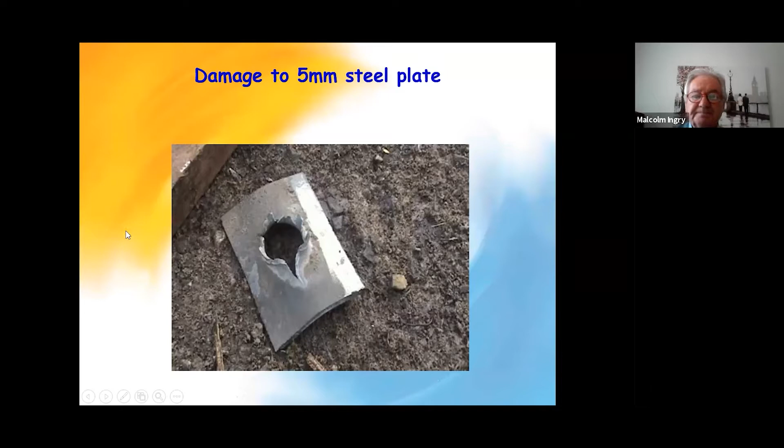It's got a velocity of detonation of something like 8,000 meters per second, and it's one of the most brisant type explosives that you can get, typically military. So this is again, sticking with the film industry, this is how it's done when you look at your television, and it's general all the way through. There's nothing, what's the word, a black mistake or anything. To get a good bomb hit or a good bang out the ground, you can see there 5 cartridges of nitroglycerin, which is approximately 1 kilogram, on a sandbag.

The reason we put it on a sandbag is if you put it on the floor, it recoils into the ground and moves shrapnel, dirt, stones throughout, killing the stuntmen. So you let it recoil into a bag, okay? And then, you can see there, anybody who understands explosives, I've got detonating cord coming all the way around in a ring main, so you won't put your detonator in, you'll put it outside. So if you have a bad detonator, you can replace it without digging into the pile.

Yeah, that's cement. Over the last few years, we've started to use lime dust, because what happens with cement, with the intense heat of the explosives, it makes it into concrete, and it moves big lumps of concrete around, again injuring people. So it's a fine limestone dust.

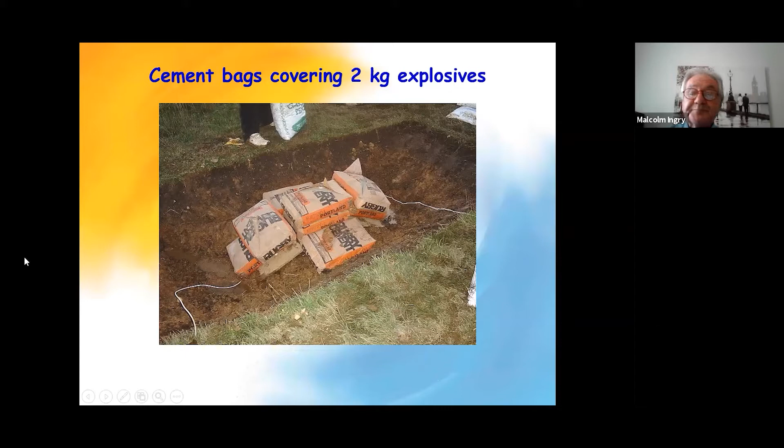And then we put our peat, our turf, and whatever. And basically, there's your bomb hit. We usually put a wide pointer if we've got 4 or 5. So when you've got stuntmen running about, you ensure that you know where they are, where you're pressing the button. Some companies have switches with probably 20 or 30 switches on, and 20 or 30 sequences, whatever you want to do. So it's all done electrically.

We also then put a dummy. The films that have a lot of money, not most of them, but the big ones, they'll get 2 dummies and they'll do a test with not real rocks, but to get a distance, just how far they need to be away from the bomb hit or wherever they're doing.

Okay, and then finally, Malcolm Ingry steps into the breach, and he stands there. Sometimes his wife finds out he's got brown underpants, and I have a go at doing it myself.

I'm standing next to quite a lot of nitroglycerine, so this is the effect. Sorry. 1. I can assure you that's not a cardboard cutout, that's me. Okay. 2, 1. And there you can see how high it goes. So it's quite a substantial bang. And then once I'm happy, then we'll go on to the set and start doing it with the stuntmen.

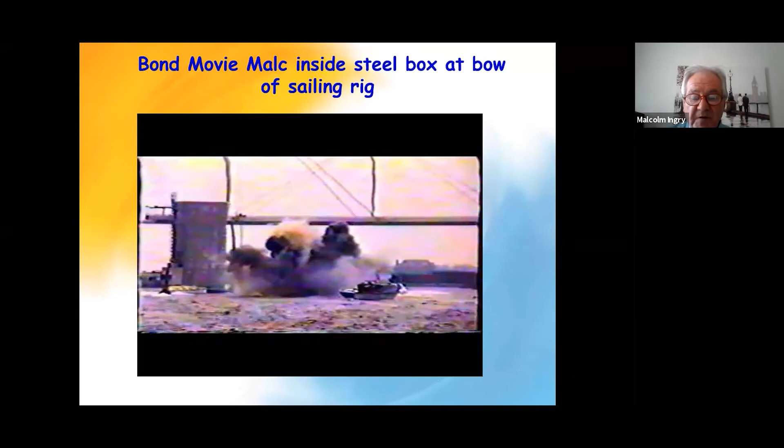So it can be quite effective. I'm safely in a steel box, and then there's one fireman down underneath with these hoses.

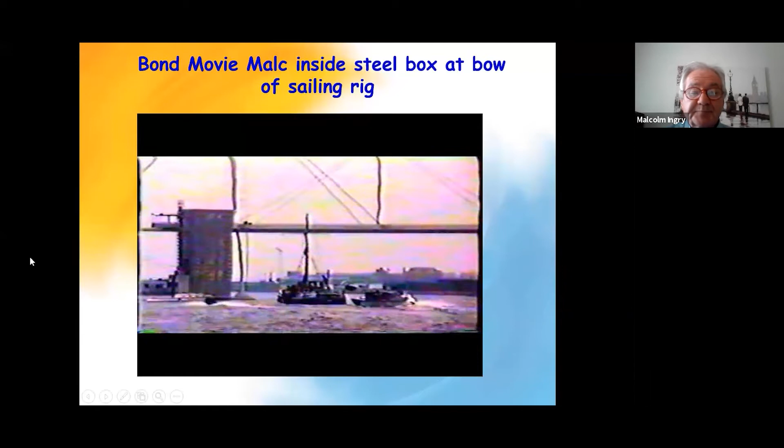Right, the sound on this is not very good. This is in a churchyard, a National Trust churchyard, just off the M25. Not the M25. It's the other one, High Wycombe. And Johnny English is at the top, which is Mr. Bean, and we're at the bottom, and he's saying this is the safest place. And what we've done, we've got quite a lot of petrol around the gravestones. And basically he's saying, you know, everything's safe, we're burying him and nothing can go wrong.

As you can see, it's quite a lot to set that up, because you've got a National Trust church, so you've got air overpressure, vibration, all those kind of things. So there was a lot of work done beforehand to ensure that the National Trust and the vicar let us loose in his churchyard.

Okay, this is Hannibal Lecter. This is the first take, which was done abroad. There was a period of time where a lot of films were made in sort of Poland and those areas, cheap labour. So this is the first take of a plane going down towards a tank. Once we're all satisfied, then this is the second take.

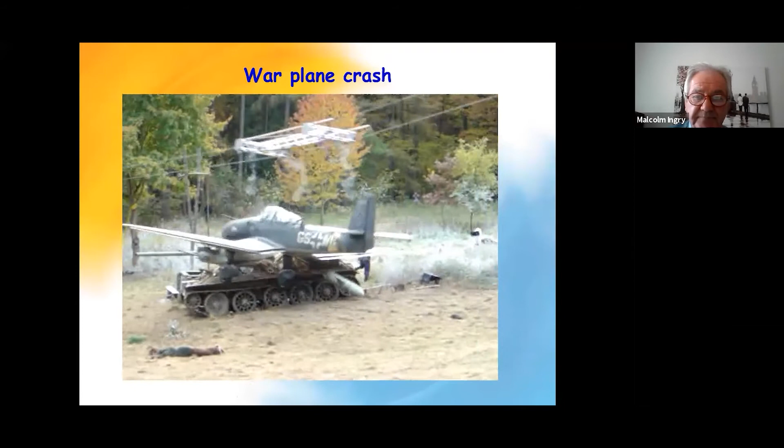See, there's quite a lot of planning there. You've got people there, real life people, stuntmen, and it looks quite effective. And again, the detaching is a small explosive that detaches the plane off a hook and that goes down as well. So it works in with the actual thing.

Now this next one is, I'm just trying to think, it's Batman. And what we've done here, what they do, the director brings you in and tells you what he wants. They use a lot of cartoon sort of sequences, and they say, this is what we want. This is Dark Knight, and this was done in Chicago. So this is basically his comic strip telling you he wants the school bus, he wants the Joker's cards coming out, he wants a real live building he can demolish. They don't ask for much.

And then this is done just prior to the school bus on its way. And then the building actually drops.

At the time, we looked all over the UK to find something suitable. I was working on a demolition up in Glasgow. We looked at that, but it wasn't what he wanted. So they had to go to Chicago. And we worked with a guy called Mark Loizeaux. And you'll see a lot of his videos if you go on YouTube. He's been here a couple of times in Sellafield and Liverpool, and I've worked with him quite a few times.

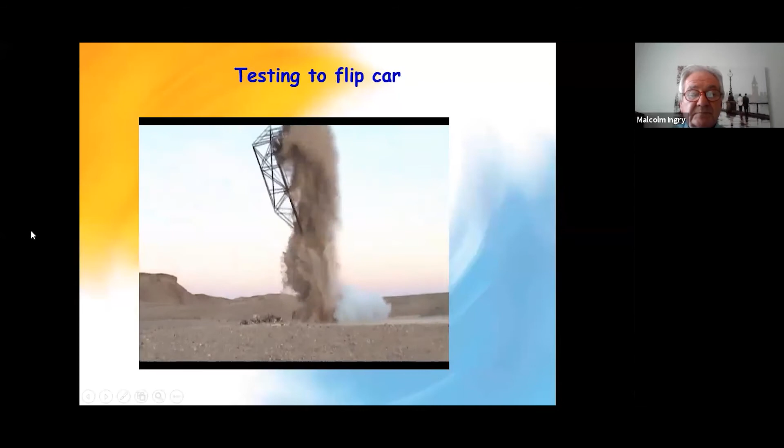Again, on a lot of these films, they'll start with a steel frame, which is the same strength as maybe a Land Rover. And in that right-hand corner there is another piston with a small charge in. And they'll do tests to see how far they can lift this if there were explosives or an IED put underneath. And then they'll revert to the real vehicle. So once they know how far it will lift, they'll go back to...

This is me and a guy called Charlie Adcock I work closely with, having a mess about on a Saturday afternoon. One.

Okay, this is from what you saw before, this is now the actual film, Ridley Scott, Body of Lies. And when you get on these sets, it really is like a war scene. So you've got all the people, cameramen, microphones there, and it's all kicking off. See that guy? And then that goes back to the film people, and then they do what they've got to do with it. They put a lot of the noise in after.

This was done in South Wales, in Newport, Captain America. It was a difficult one, because they wanted some army vehicles here, and Captain America was going to come out of here on his motorbike, and they wanted to drop this, which was a light building, and you can't normally drop them with explosives because it's light brick. So you use the inertia of a block of flats. It's easier to do than a light brick building.

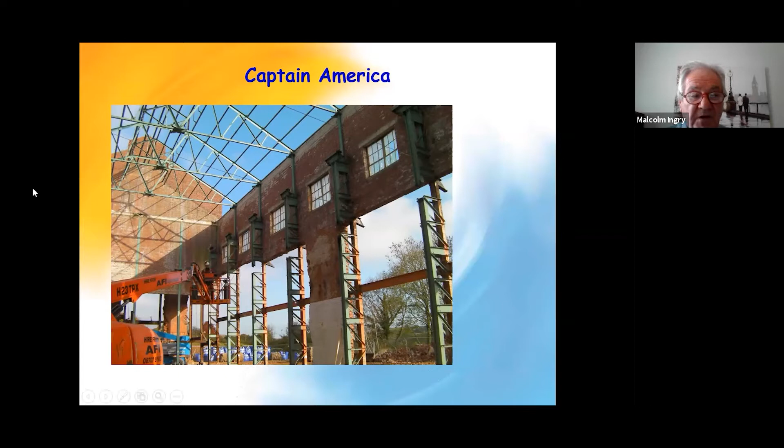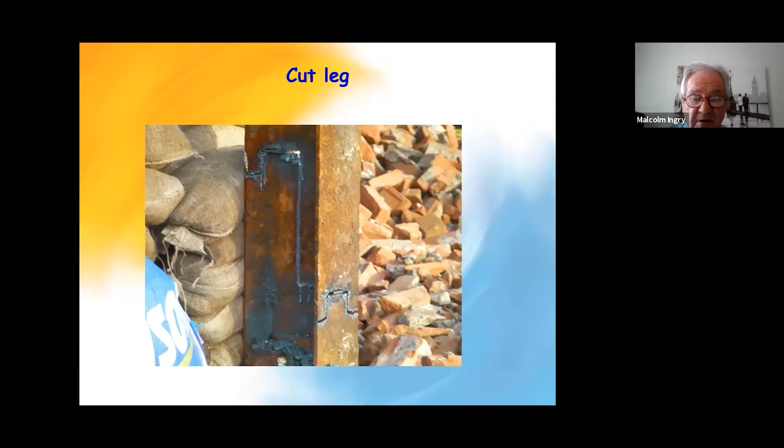You have a cut there and a cut there, and the maximum amount of nitroglycerin cartridge you can get by your calculation, that's how many fingers you've got on your hand. There's no hard and fast calculation, only from experience. And you kick that leg out, and you do that with all of them. And when you kick the legs out, actually the building comes down. A little bit of useless information.

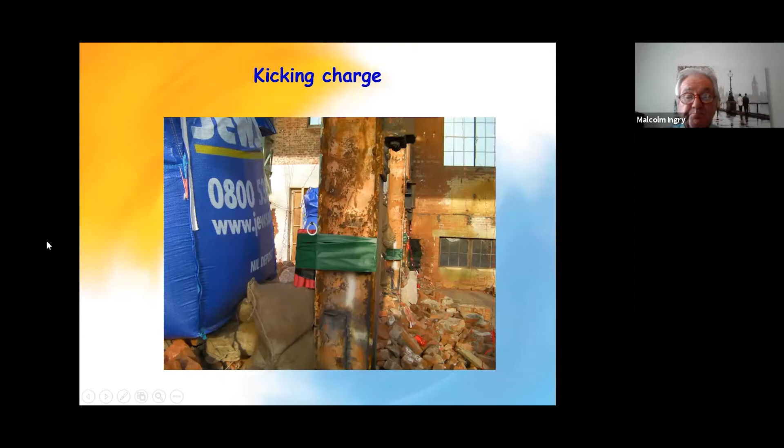So this is the building coming down. Now this is in slow motion, so it doesn't do it justice. And there's a couple of 100 gallons of petrol inside as well, just to give it a good effect. And you can see the building start to drop and pull over. And the film people have got their effect. The next slide's a little bit more interesting because you've come from the back now. And it's down on the floor. Okay, nothing left.

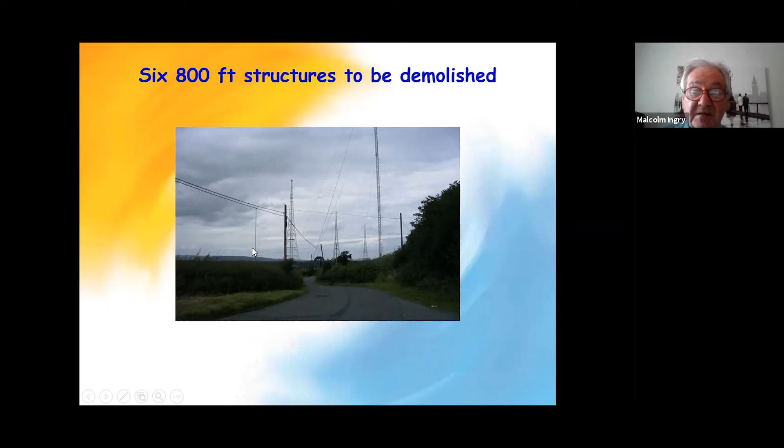These are military cutting charges. Basically, how they work: there's a standoff. It's called the Munroe effect. And whatever the standoff is, the amount of RDX or plastic military explosives goes through this where that detonator is, and then cuts the steel. This particular one, we wanted a military cutting charge that would cut up to 40 mil steel, so quite substantial. Again, you don't have to bolt it on; you can just tie it on with rope. It makes its contact, but not an easy exercise to do by anybody's standard because it has to be precise.

And what you normally have to do as well, you have to normally put a bolt hole in this when you're making these cuts and shears, because what happens, it not only cuts, it kicks. And I've known pieces like that, if you don't fasten it down and steel it with chain, will travel probably half a mile. You can hear it coming through the hedges towards you, and you don't really know where you're going to have to run.

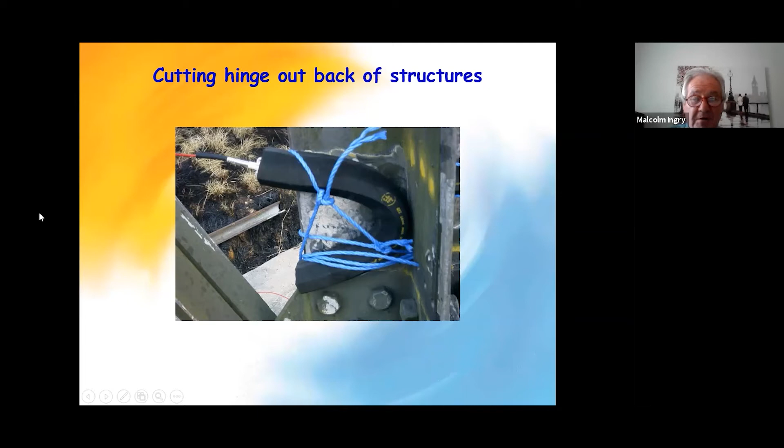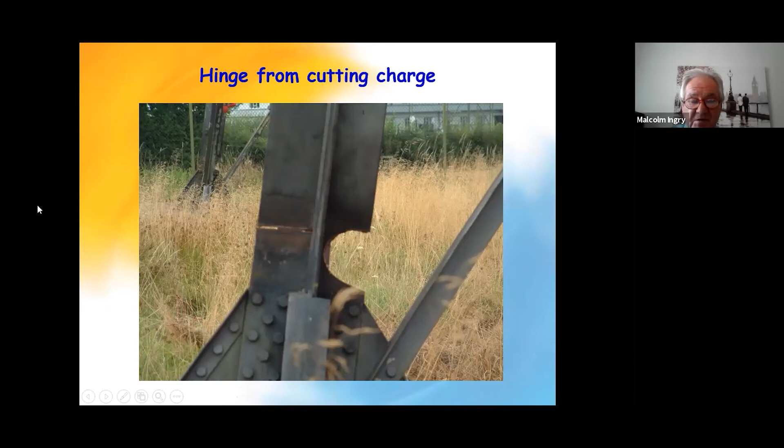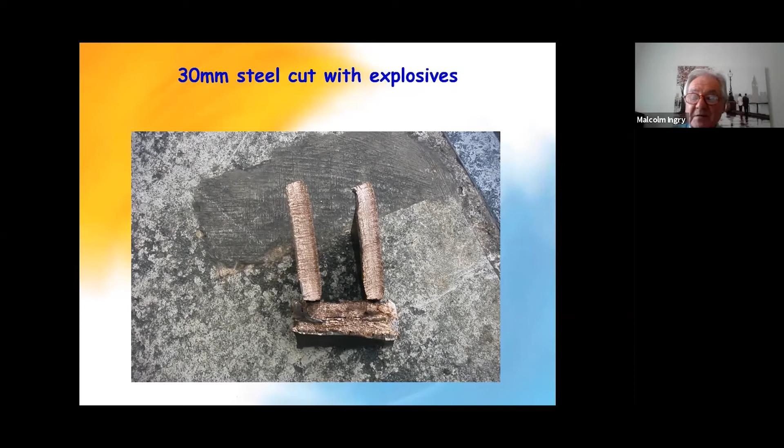And there's the cut, which it makes. So that makes the hinge. So you cut across the back there and a cut there, and then that allows the hinge for the structure to drop based on what the structural engineer will let you do. And there's the cut. That brass copper look you've got there, that's from the shape charge. The lining is copper, so it makes the actual end product look like it's copper.

Okay. And this is the... we had 6 of these, over 2,000 tons of steel. They're big. They're not like the ones when you're riding down the motorway and you see them on the side of the road. These are humongous.

Okay. The towers and the mast actually, what they do, they bring the firm in and they ease the ropes that hold it there, and they pull it so many degrees towards you, and then when you cut the stays at the back, it drops over. That's what it tells you in the textbook. I can assure you it don't always happen like that.

This is me quite a few years ago in the middle of Kidderminster on a Sunday morning, dropping a multi-storey car park, which is only, if you went round the other side, in a pedestrianised and only 3 metres from a shopping complex. 5, 4, 3, 2, 1, fire!

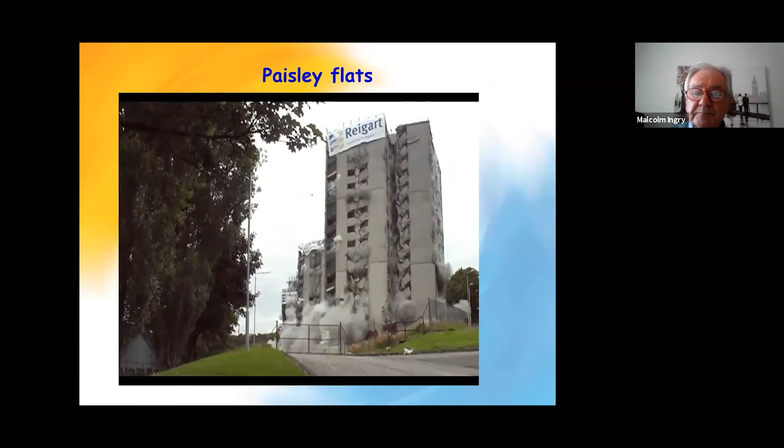This is the Americans again up at Sellafield. I worked with them on this. And again, it's an interesting piece of filming because it gives a little bit more into how cooling towers come down. We've got 4 coming down not far from me on, I think, June the 6th at Ridley. They're not easy to drop. Even though they're only about 4 to 5 inches thick with concrete, there's a technique, and if you don't get it right, they'll stand. 2, 1, fire.

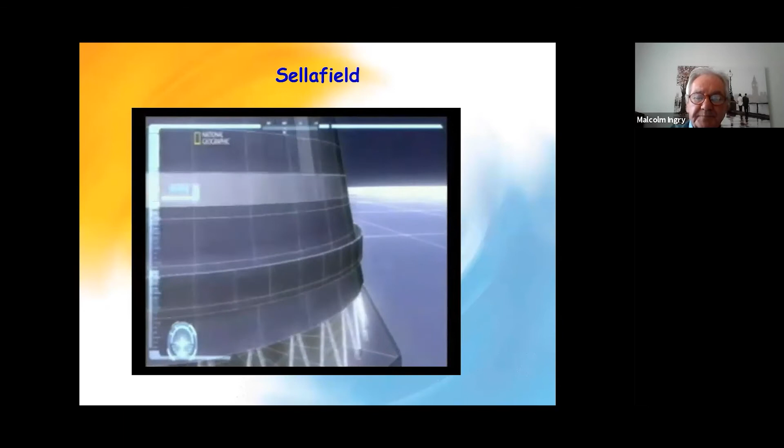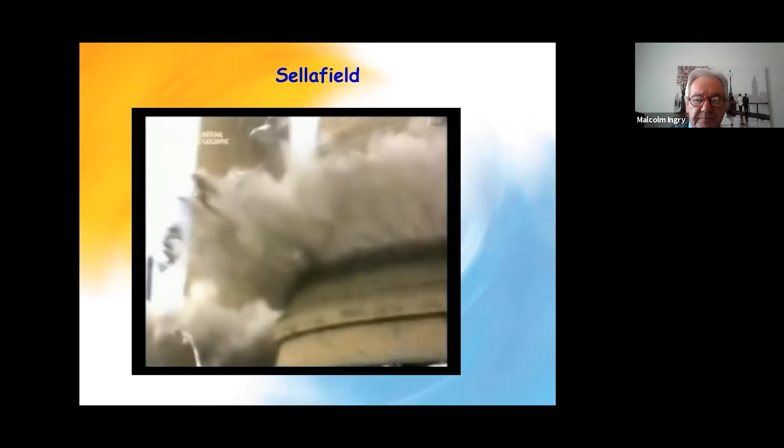We're clear. 25 milliseconds later, the 200 leg charges ignite. 1 second later, Malc explodes the second tower in the same sequence.

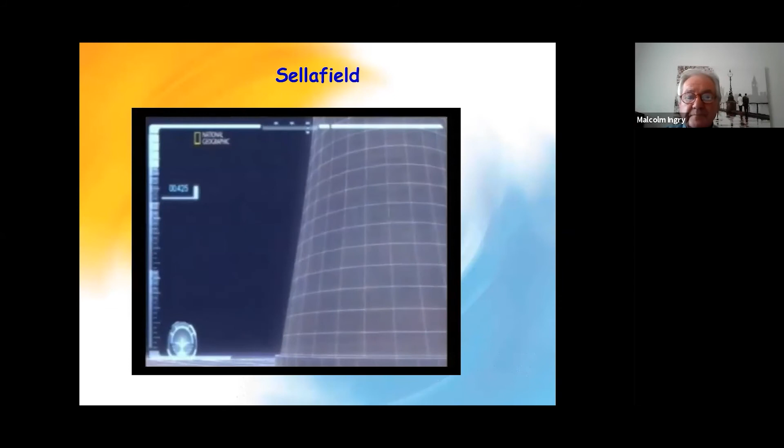Okay, they use what they call an inverted T. So if you look at the cooling towers and go inside, about 30, 40, 50 feet up, they'll do a metre ring all the way, what I call a domino 5 with shot holes in, which they'll put cord and about 1 inch of nitroglycerine. And then they have an inverted T. So they'll put another one up, an upside down T in the middle. And so basically the legs go just a little bit after, and then that inverted T twists it and brings it down.

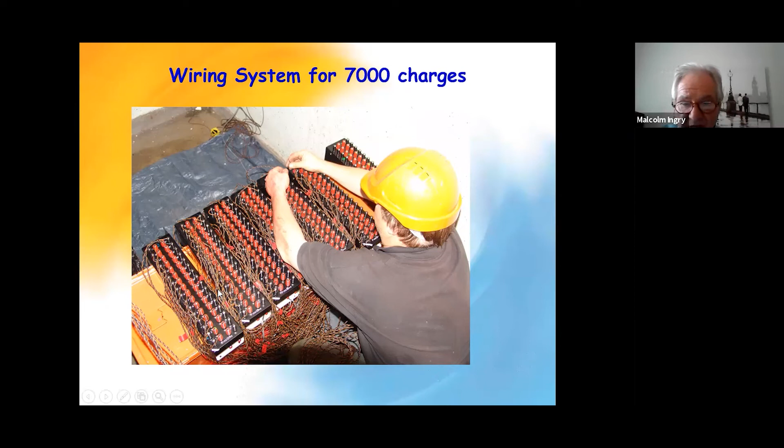So it was all done with electric dets. There were over 7,000 charges in that, so it's quite a complex wiring up system. You can see the 5-gallon little drums on there, all fastened off. So the whole idea again is to get it to go up the building from the bottom to the top with the coloured paints on.

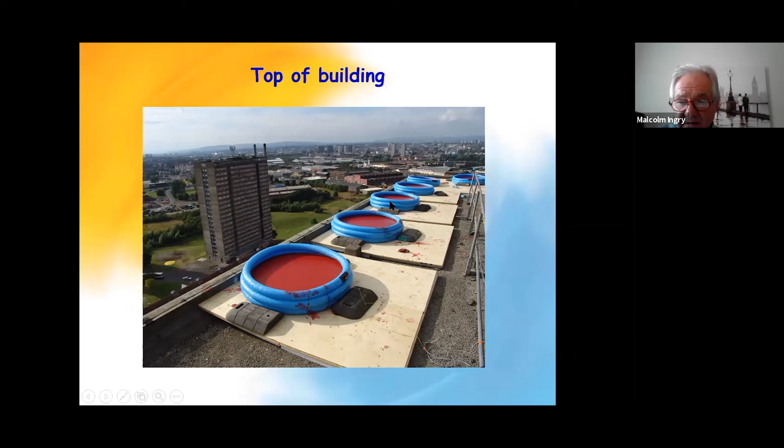Okay, thanks. Hope you've enjoyed that short talk and a little bit of my life, yeah? Malcolm, thanks ever so much for that. That was very interesting. And how are your nerves? They're pretty good. No serious shaking or anything? No, I'm okay. That's very interesting.